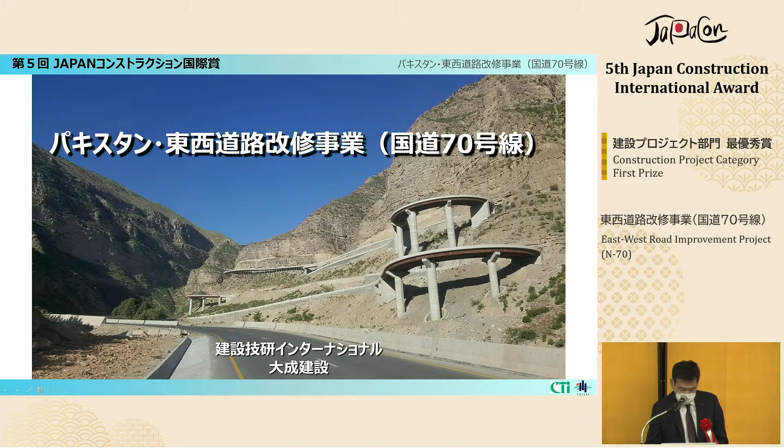This project is part of the National Road Improvement Program in Pakistan, financed by loan assistance from the Japanese government. The aim was to enhance the overall capacity of the N70 corridor and make the road more resilient against natural disasters. The consortium headed by CTI Engineering International provided advice and expertise in design and operation management, and our company completed the construction. The project improved the 12-kilometer road with a height difference of 600 meters in steep mountainous areas. Construction started in 2016 and was completed in 2019.

This is a map of the area to give you some background. Route N70 is one of the major highways running through central Pakistan, connecting the two major cities in the east and west of the country, from Multan to Quetta, 445 kilometers in distance. There are major cities like Islamabad or Karachi in the eastern flank of the Indus River, which runs through central Pakistan, and there's a well-developed transportation network connecting north and south of the eastern half of the country, but there are only a few major highways connecting the thriving east to the mountainous west.

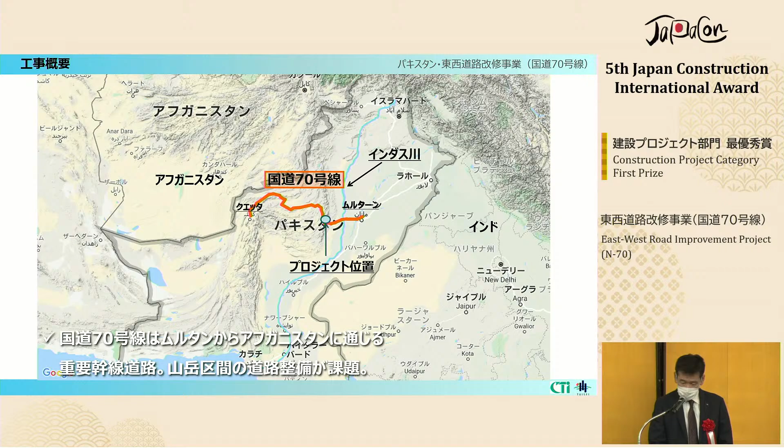Also, Route N70 is an important road connected to the border with the neighboring country, but the improvement was coming in late because the section of road in the scope of this project is known as the hardest part in the steep mountainous areas, requiring advanced construction technology and expertise.

This is the situation of the road before the project started. The sedimentary rocks form the steep terrain, making it a really vulnerable foundation with weathered rocks strewn on the slopes beside the road. The narrow road runs on the steep slope with a lot of congestion and closures along the way due to debris and fallen rocks.

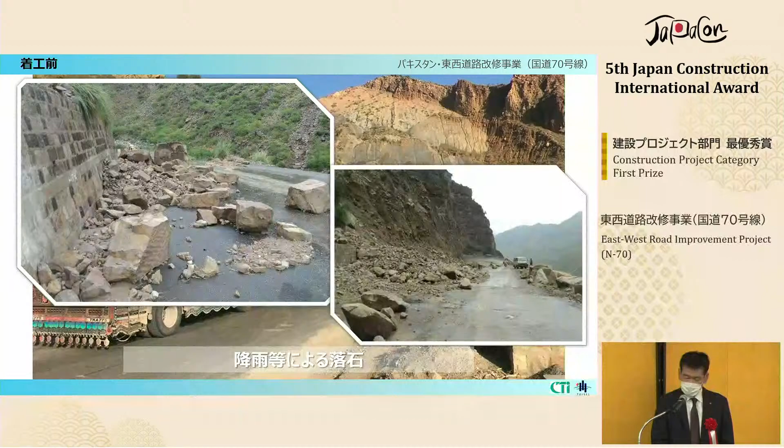The section of the road in the scope of this project was particularly narrow and steep with a series of tight curves, and vehicles had to stop to go around them. As shown in the picture, these trucks needed to turn the wheel several times to let other cars pass through.

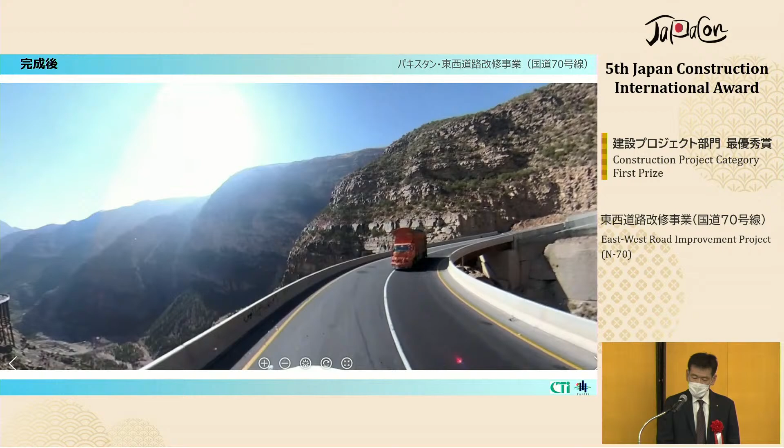This video shows the same section of the road after the improvement. There are two lanes on the road, and those curves were made much smoother so that heavy trucks can easily go around.

This is a summary of the construction methods adopted in this project. The aim was to increase overall capacity and resilience against natural disasters. We expanded the road width to two lanes from end to end and improved the road alignments in terms of slope and curvature by constructing additional 11 bridges at the steepest sections and sharp curves. For the tight curves on the steep slopes, shown in red circles, we constructed circular steel box girder bridges.

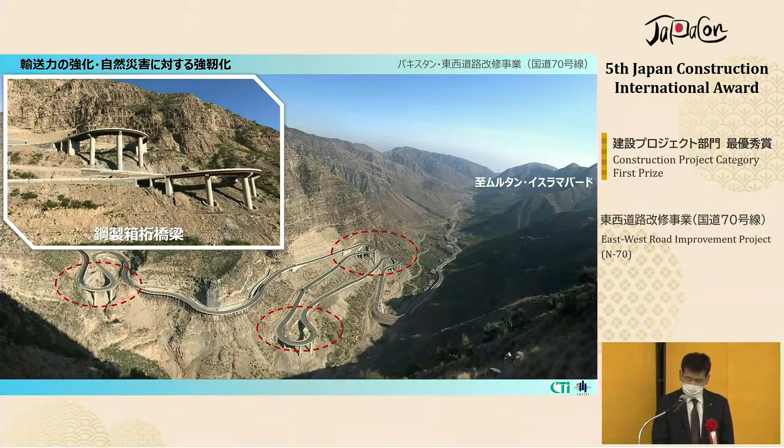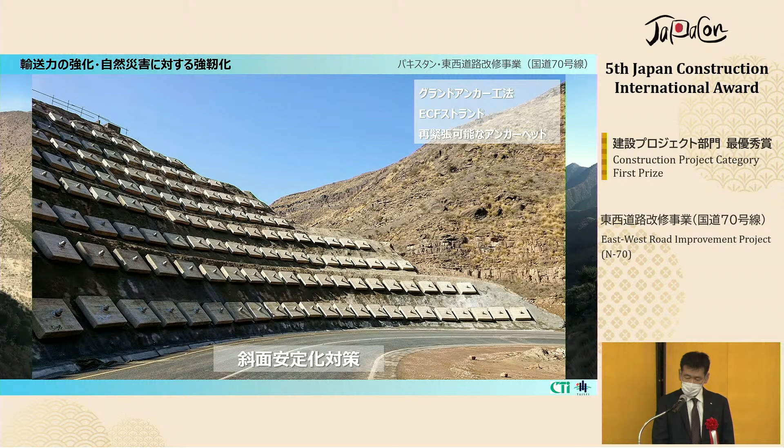Other Japanese engineering methods and technologies adopted for this project include ground anchors to stabilize slopes, as well as the foamed cement banking method and mechanical stabilized earth retaining wall construction, to improve the road alignment and reduce the life cycle cost at the same time.

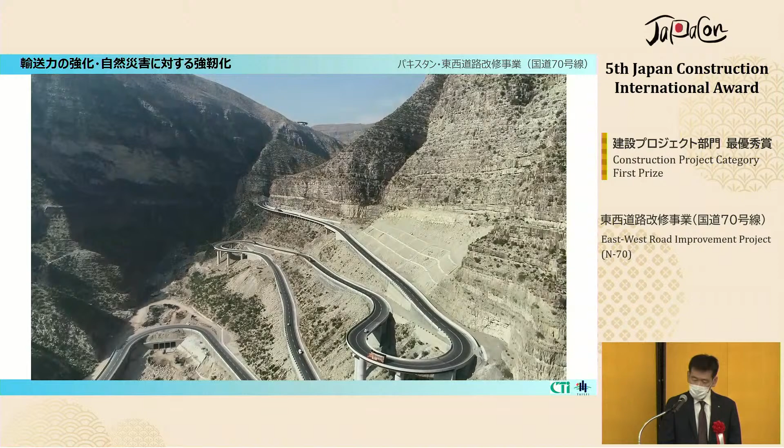You're watching aerial footage of the section of road which was in the scope of this project. It clearly shows a very tough, steep terrain. The specification requirements for this project are as follows.

One of the biggest challenges to complete the project was how to ensure security in the area. We needed to reinforce security around the workers' camp and offices. The client also hired armed security guards to protect the camp as well as to provide security to the workers in traveling, so the staff coming from Japan experienced some inconvenience. But we were provided with security information by the Japanese Embassy, the Ministry of Foreign Affairs, and JICA so that we could successfully and safely complete the project.

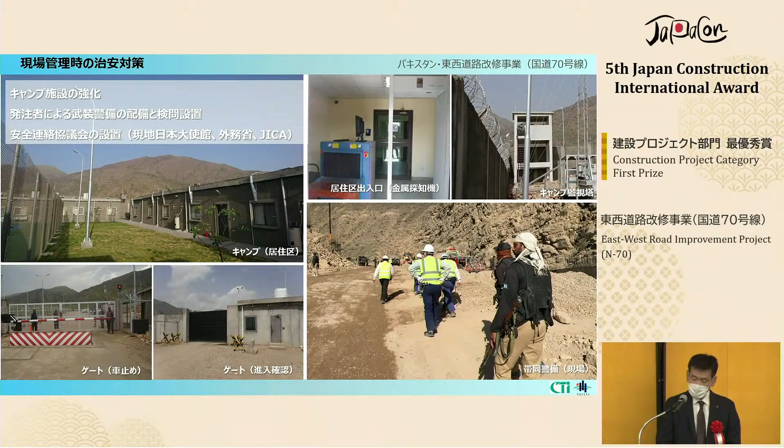Last but not least, let me talk about some of our initiatives that deepen the friendship between Japan and Pakistan. It was difficult to conduct PR activities during the project because of security concerns, and yet the Japanese construction and engineering technologies used in this project were featured at some of the events and parties organized by the Japanese Embassy with government officials of Pakistan, or a meeting with Pakistan's Prime Minister.

We also engaged the client in writing a maintenance manual to ensure proper maintenance, and also engaged local construction workers in skill training with Japanese companies. After the project was completed, some of the workers are now involved in construction projects in Japan.

This project accomplished the mission of improving the national road in Pakistan by using Japanese technologies. We are convinced that this project wouldn't be a success without the team of Japanese companies mobilizing their expertise and resources. We are also extremely grateful for the support and assistance provided by the Japanese Embassy, the Ministry of Foreign Affairs, and JICA. Last but not least, we want to express our deepest appreciation to the Ministry of Land, Infrastructure, Transport, and Tourism for this precious award, which highlights the achievements of Japanese construction companies. Thank you very much.

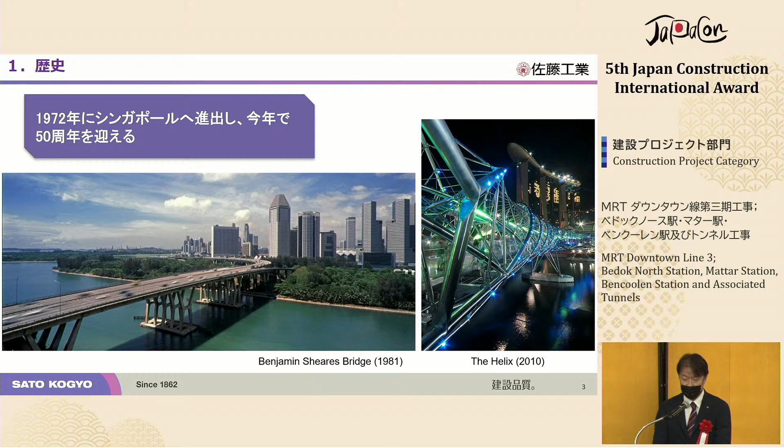During the 50-year history, we helped build iconic structures in Singapore, such as shown in these pictures: Benjamin Sheares Bridge, or the Helix. I think many of you know this building - it's a stainless bridge next to the Marina Bay Sands.

We're currently involved in projects right now as well. So let me give you an overview of the 3 projects for which we received the award. This is the Singapore MRT line scheme.

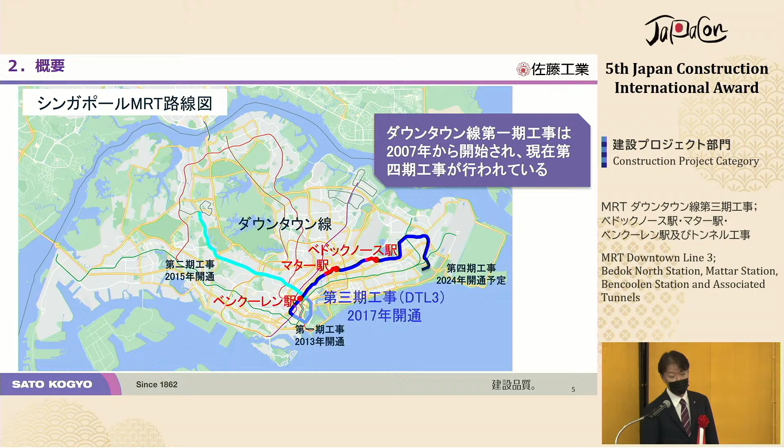MRT Downtown Line. This connects the north residential area to the south, more commercial areas, and you see Changi International Airport. Again, this part is also a residential area. We are involved in the Line Stage 3 construction. We constructed Bencoolen station, Mattar station, and Bedok North station, and associated tunnels.

So for each section, this is the overview of the construction. The client, or procuring entity, is the Land Transport Authority of Singapore. The period lasts from April 2011 to December 2016. This is designed by Arup, a British design office, and EDIS, the construction and interior company in Singapore. So we partnered with these teams to finish the construction.

The hallmarks of this construction is that it has 6 basement levels with a total floor area of 24,000 square meters. For construction of the new underground station, we used the inverted lining method in a very limited space.

The ground consists of sandstones, and it's 43 meters deep. The Roppongi station is actually 40 meters deep, so it's deeper by 3 meters.

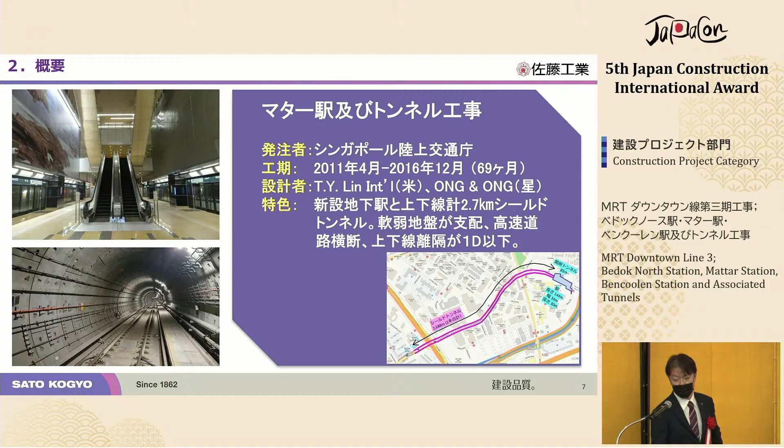This is the station, a Mattar station, and associated tunnels. The client was the Land Transport Authority of Singapore. The construction period was from April 2011 to December 2016. One of the hallmarks, the difficulties of this construction, is that the ground was really soft.

This is Mattar Station and associated tunnels, designed by TY Lin International and ONG. This is mostly soft ground.

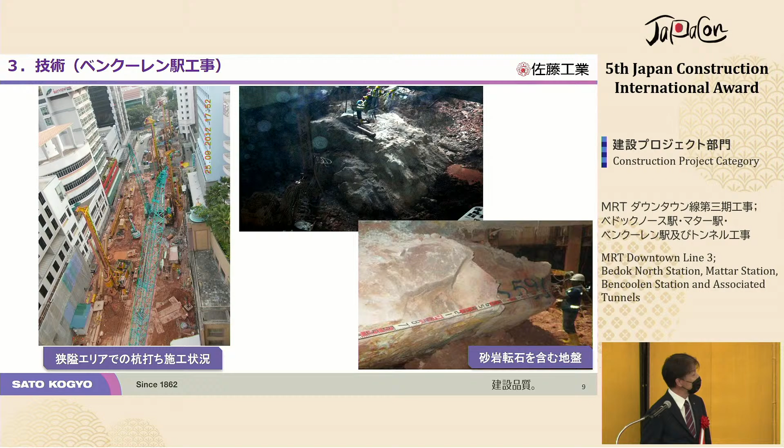One of the technological challenges is for Bencoolen station, where you see a lot of gigantic boulders, like a meteor, really gigantic rock we encountered as we excavated. Also, the area is really a limited space.

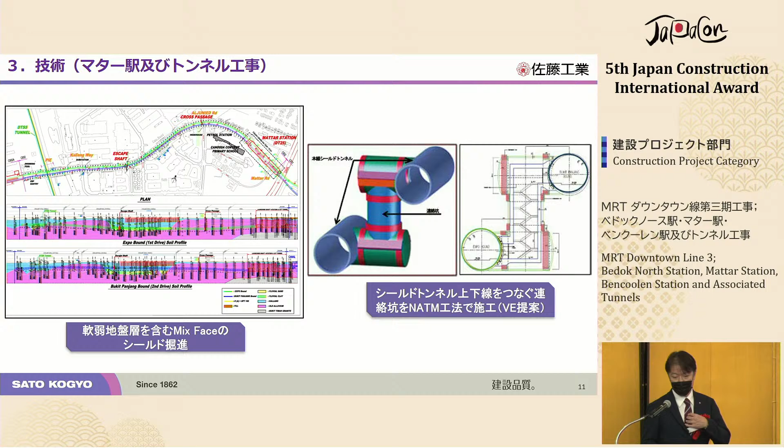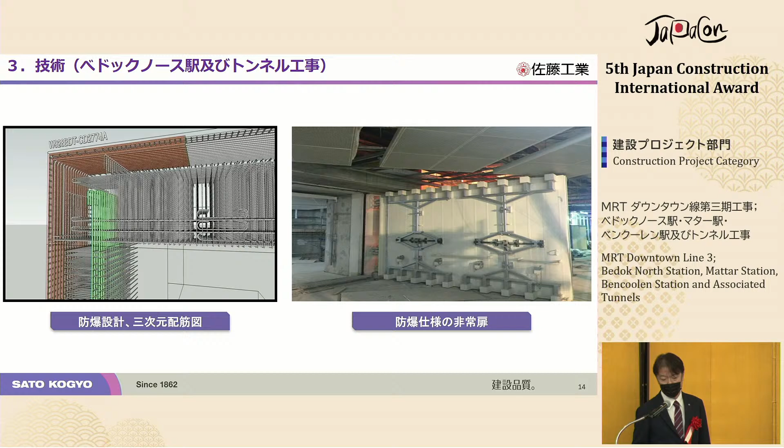For Bedok North Station, we used a TBM manufactured by a Japanese manufacturer, and this was an explosion-proof station. So we did reinforcements, and we have been recognized by Singaporean authorities for the construction.

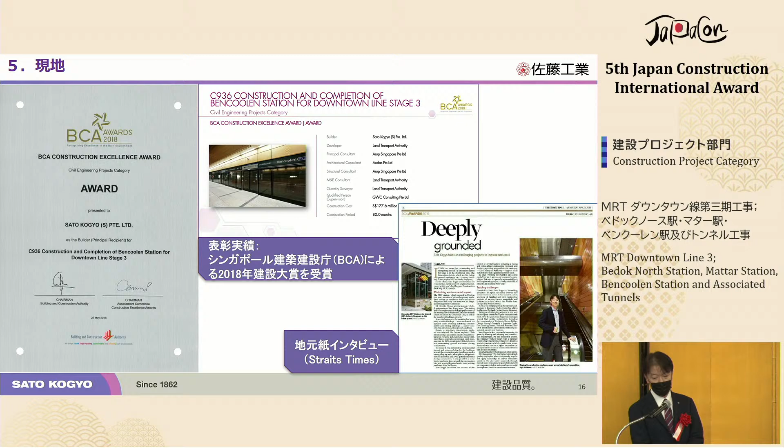Our construction efforts were covered by local media, and we received the BCA Construction Excellence Award. There was much media coverage in the local media.

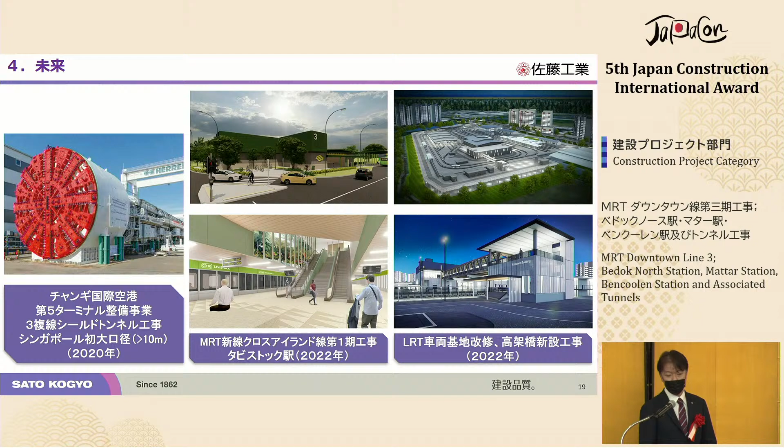We are currently involved in 3 more projects: the construction of a new terminal at Changi International Airport, the MRT New Line Cross Island construction for Tavistock Station, and a large-scale renovation for the LRT rail yard.

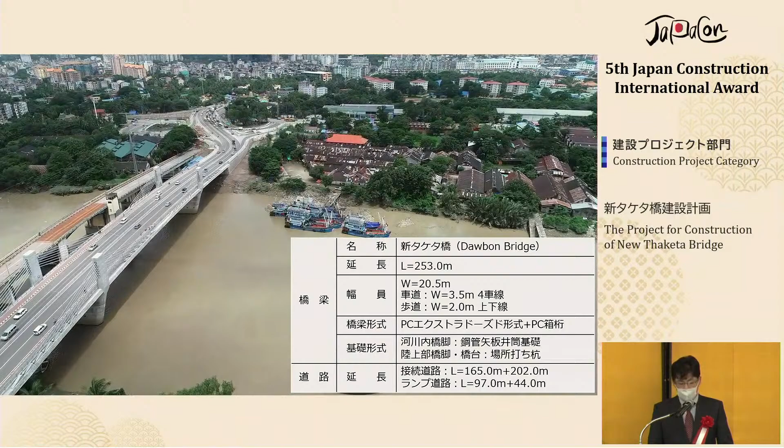This is the picture, aerial footage of the bridge after the construction is completed. The new Thaketa Bridge, also known locally as Dawbon Bridge, is the core of this project. The bridge is 253 meters long and 20.5 meters wide. It's a PC extradosed bridge with towers and diagonal bracing.

A steel pipe sheet pile foundation was adopted for the bridge piers, supported by the cast-in-place piling method on the surface. The project was financed by grant aid provided by the Japanese government. The procuring entity was the Ministry of Construction of Myanmar. It was designed by Nippon Koei and constructed by the consortium of Tokyu, Toyo, and IHI Construction Services, and the whole project was managed by JICA.

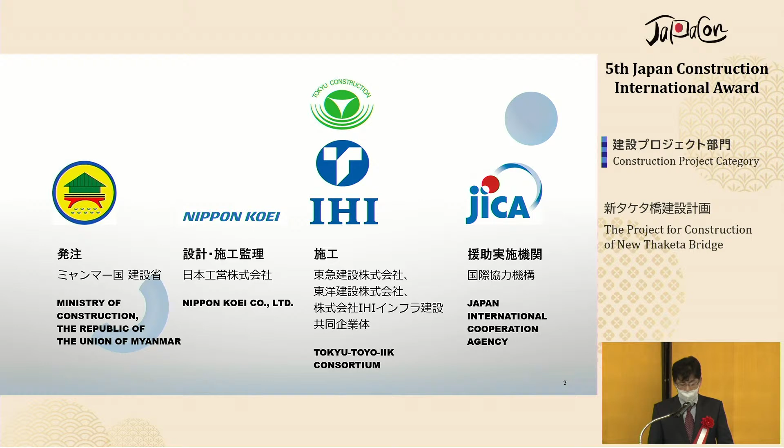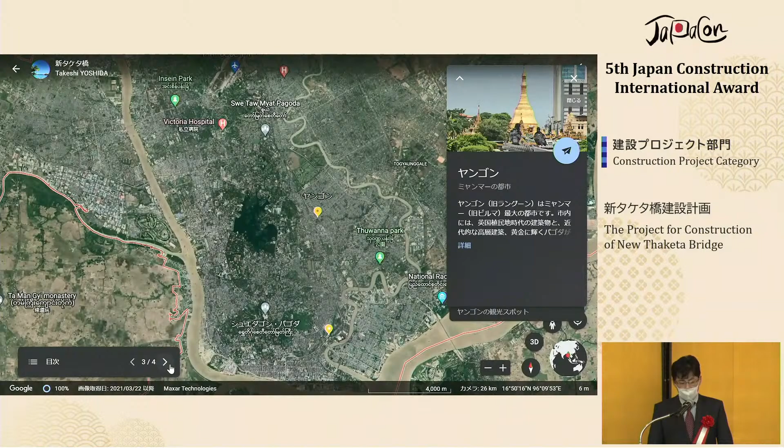The distance between Myanmar and Japan is approximately 4,500 kilometers, taking about 8 hours by air. Myanmar is the westernmost country in Southeast Asia, sharing borders with India, Bangladesh, China, Laos, and Thailand. The largest city, Yangon, is located in the south of the country, and the existing bridge over Pazundaung Creek connects the city center and the special economic zone, and is one of the logistically important bridges in the country.

The aim of this project is to construct a new bridge next to the existing bridge and connect it to the existing roads with connecting roads. It was a construction of roads totaling 620 meters in length. The road expansion project was carried out at the same time by a Burmese company for the Blue Line section of the road. As a result, the roads now have 4 lanes, and traffic congestion has been eased significantly.

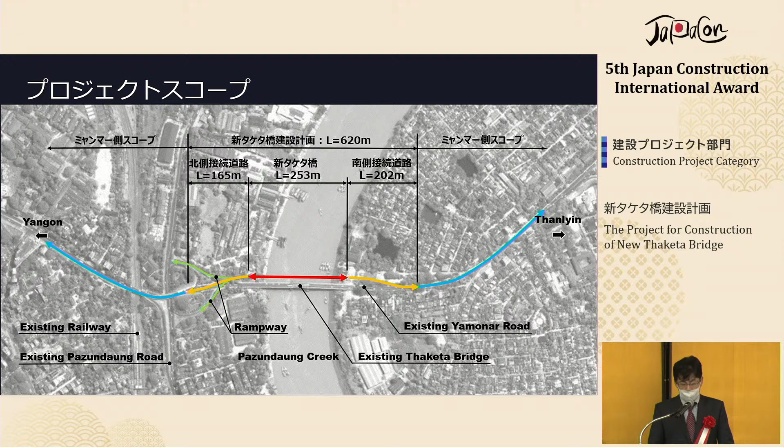The existing bridge has been used for 60 years or so. It has only 2 lanes and very limited space for the shoulders. It used to be a bottleneck and caused traffic congestion. It was an aging, unsafe structure. The project was carried out to improve the situation and to ensure safe passage through the bridge.

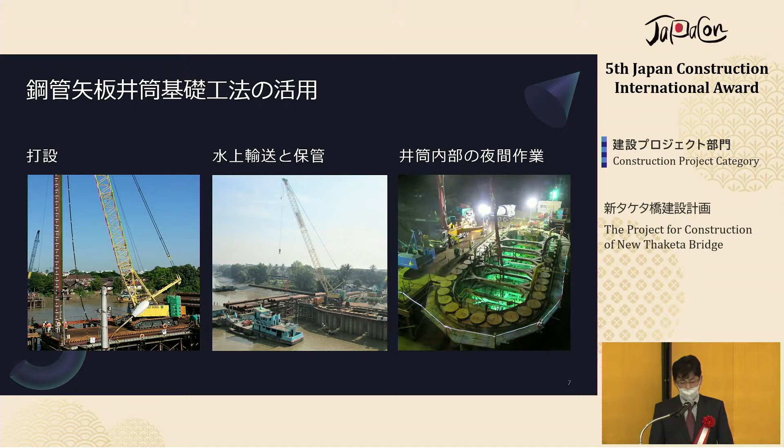One of the technical hallmarks of this project is the adoption of a steel pipe sheet pile foundation for the bridge piers, the first of its kind in Myanmar. This method serves as a cofferdam in a bridge foundation and reduces the construction period. It's also a weatherproof method. One prefabricated long steel sheet pile was transported by ship to complete the foundation work.

Pazundaung Creek is a major waterway, and many ships cruise up and down the creek. We adopted the PC extradosed bridge because of its lower girder height and appropriate span length to ensure unobstructed passage of ships in the waterway.

This was also the first method introduced in Myanmar. The project also involved a technical transfer program for officials of the Ministry of Construction of Myanmar. The program consisted of lectures on survey of rivers and soils and design of bridges, as well as OJT activities where participants experienced field work and project management.

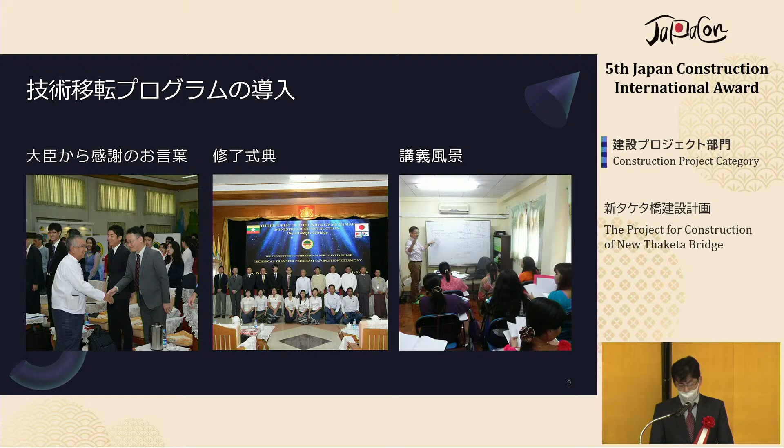Every participant completed the training program, which lasted from January 2016 to February 2018, and in March 2018 a ceremony was held to congratulate those participants, joined by the Minister of Construction of Myanmar.

The project was completed in July 2018 without any major accident, and the opening ceremony was held with much fanfare in September. The opening ceremony was attended by local residents and many dignitaries and guests in Myanmar and from Japan as well.

That brings to an end of my presentation. Thank you very much.

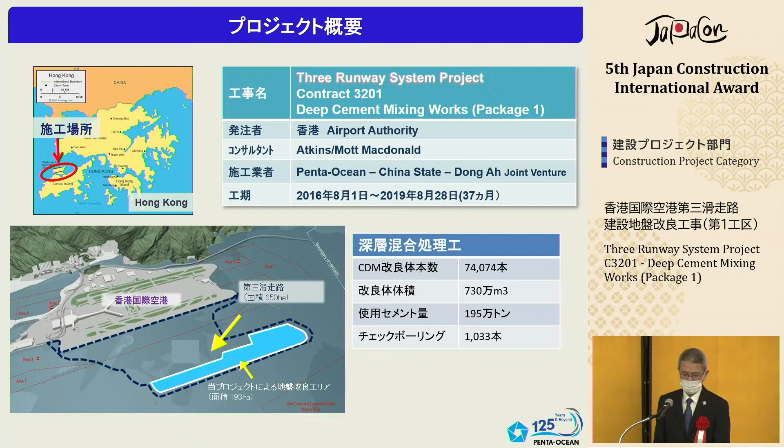We had Airport Authority Hong Kong as the project owner. The contractor was a 3-company joint venture, and the improved volume was 7.3 million cubic meters, and the cement used was 1.95 million metric tons. This was quite an extensive size of project.

The challenge was insufficient soft ground strength and subsidence in coastal development, so we applied this method. Back in 1975, the cement slurry mixing and solidification method was established and put into practical use, and we've been accumulating a great track record with this method inside and outside Japan.

The characteristics and strength of this method are that strength emerges in a short period of time, shortening the construction period, with no liquefaction and minimal impact to the environment. These are the strengths that attracted the interest of the project owner.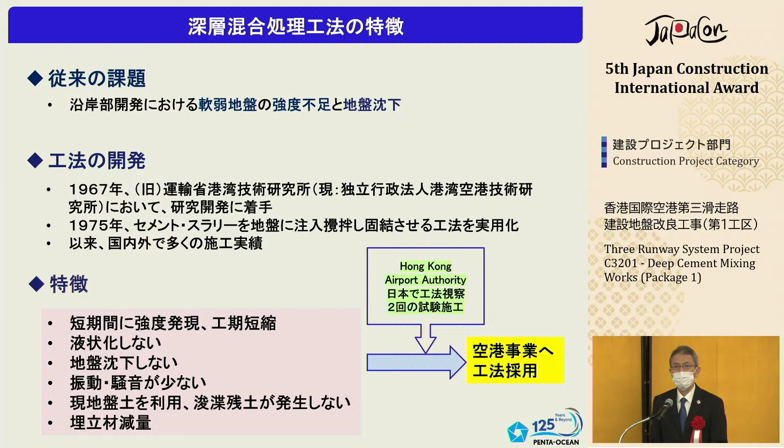We conducted testing in the field after doing small-scale testing in Japan, and we adopted this project. This is the state of the site back in 2017.

We had 40 operating ships. In total, 200 cruisers and ships dealt with this project, so we needed to orchestrate all these activities done by many ships. We laid out various schemes, including what to do in case a typhoon hits.

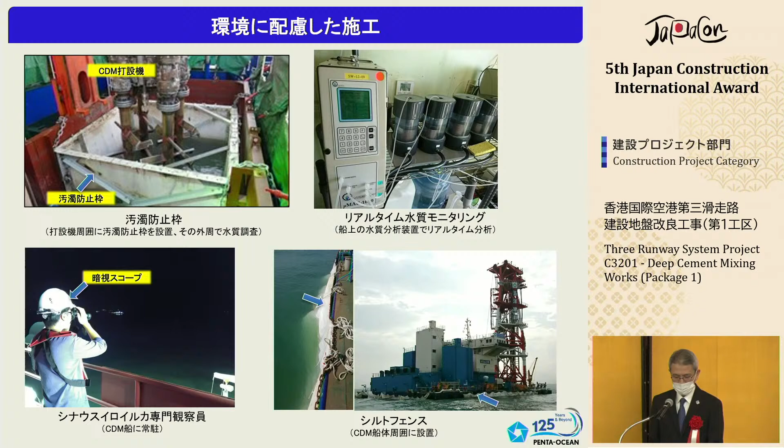We took extra measures to make this an environmentally friendly construction. Pollution prevention frames were put in place, and real-time water quality monitoring was done day and night. If we noticed any irregularity, we stopped the whole operation, prioritizing minimizing impact to the environment.

This was quite a diverse, inclusive project. We had Indonesian and Nepalese people in the field, so we used several languages in communicating. We had virtual reality for remote work done by people managing the process in Japan, and we prioritized safety, making sure all involved could contribute in the best way possible.

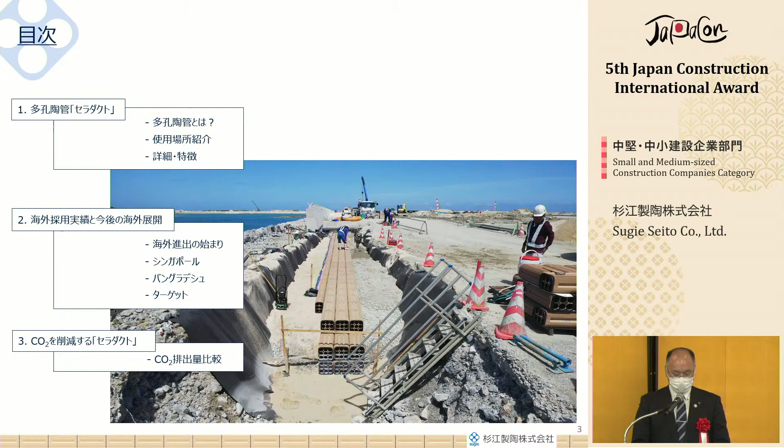First, about our company. We're based in Aichi Prefecture, with factories there too, and we have branches in East Japan, West Japan, and Singapore. We manufacture and sell perforated ceramic pipes for underground cable protection. We established our business back in 1906 as Sugie Pottery. There are three items I'd like to cover in this presentation: first, what CERA-DUCT is, the perforated ceramic tubes; second, how we've been doing business overseas; and third, how CERA-DUCT reduces CO2 emissions.

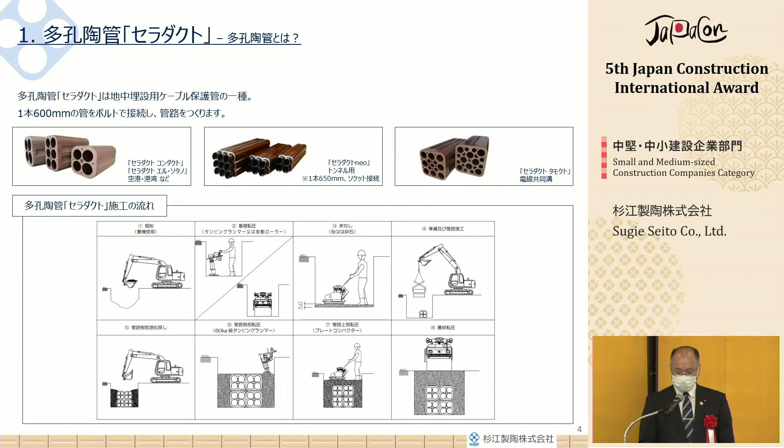So what is CERA-DUCT, the perforated ceramic tubes that we manufacture? This is quite a versatile tube. We can shape them in many different forms, used in many different construction sites, including airports, ports, tunnels, power stations, etc., and underground tunnels for electric cables. We have a track record of this being used in 30 different airports. For tunnels, this has been very valuable material because it's fire resistant, and it's a very efficient cable tube for very limited spaces.

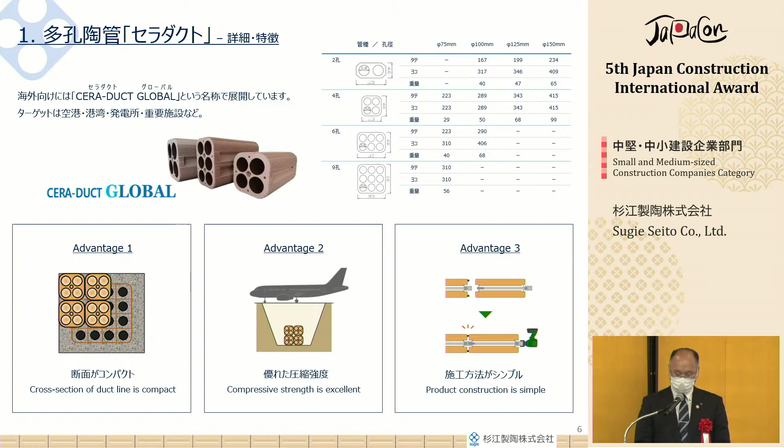With a great track record inside Japan, we decided to go global with CERA-DUCT GLOBAL. We have three advantages to this product: first, the cross-section of the duct line is very compact; second, the compressive strength is excellent; and third, the product construction is super simple. Because of these advantages, we can minimize the cost and shorten the lead time that our clients need to achieve their goals, and we've been supported by many business partners in building up a great track record.

CERA-DUCT is quite heavy material, so at the beginning, many people thought it would be difficult to export economically. But we had a project in Okinawa, and we discovered that the transportation cost wasn't as much as we thought. So we started going global, but we had no track record doing business outside Japan.

It was very, very difficult to break the barrier. But there was an international business promoting workshop led by the Ministry of Land, Infrastructure, Transport and Tourism. We took part in those initiatives, and we gradually started making a presence and built up success.

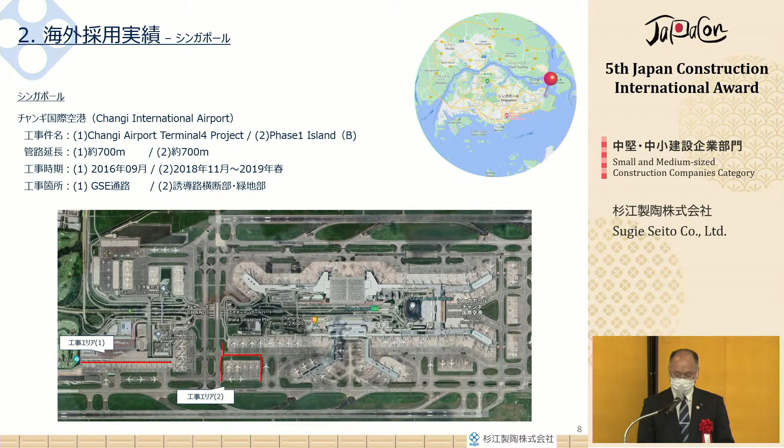This is Singapore's Changi International Airport. We had two phases and two projects, one 700 meters, another also 700 meters. It started back in 2016 and was completed in 2019. We actually did a demonstration bringing our product, and showcased how quickly they could complete the plan, managing to contribute to making the lead time one-third of the original plan.

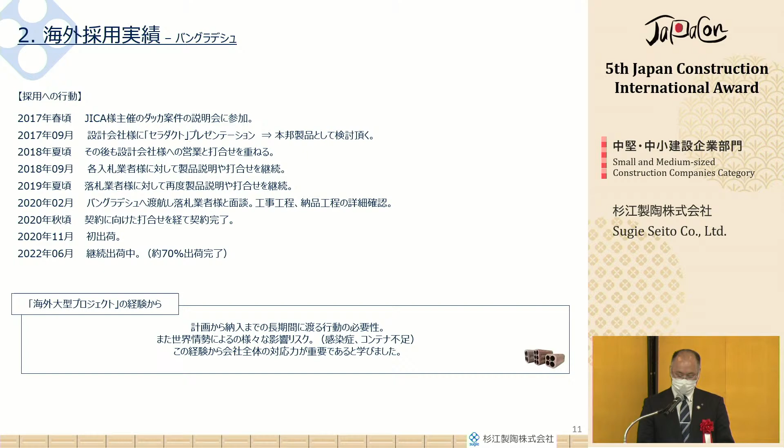This is the second one, Bangladesh's Hazrat Shahjalal International Airport. This too was impacted by COVID, and we couldn't fly freely to the local area, so we managed the project remotely from Japan. We were highly reputed for how our remote management worked quite effectively, harnessing the capabilities of the local people, and we've continued to be bold outside of Japan.

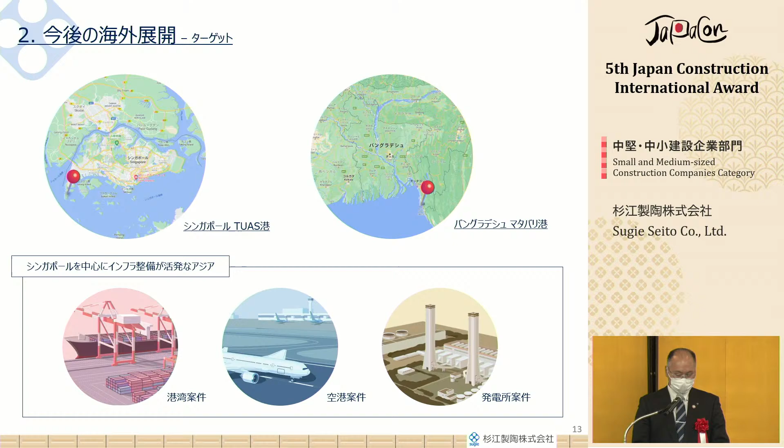We have all these lead projects. We're going to be targeting Asia and various regions as our success-building ground.

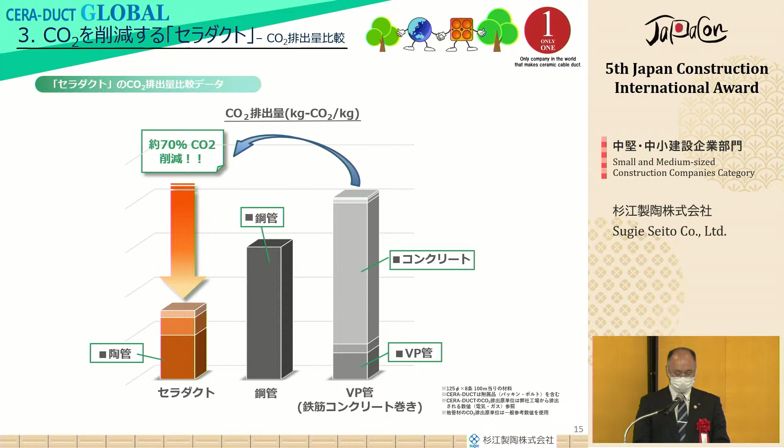This is the CO2 emission contribution we can bring with CERA-DUCT, a comparison with regular cement or concrete. By replacing other materials with CERA-DUCT, we can see a reduction of as much as 70% of CO2 emissions. We will be harnessing the strength of ceramics, and would like to contribute to society and businesses in many different ways. Thank you very much for your listening, and thank you very much once again for the award.

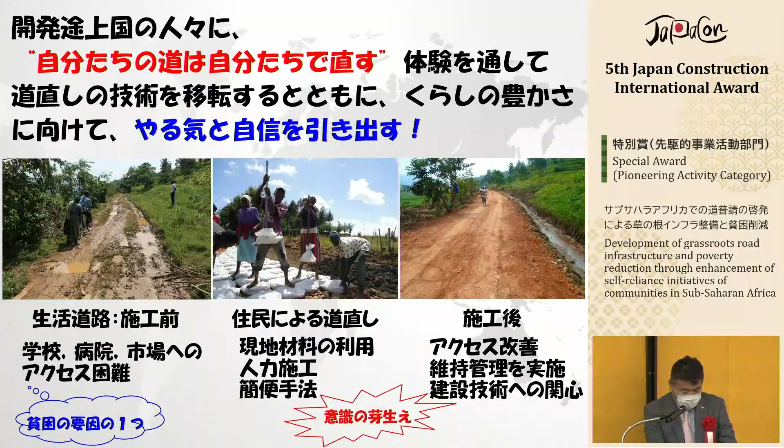We'd like to give this experience of fixing road infrastructure to developing country people, so that they can actually fix all these road infrastructures themselves, making them more confident and forward in building their own infrastructure. The before state is on the left hand side with the sandbag. We could actually fix the road with the labor forces of the local people, not necessarily professionals of the industry. By going through this experience with us, they will learn how to fix it, and eventually be able to do it without any of our help. That's what we'd like to achieve. The do-nou, it's a sandbag in Japanese, but we'd like to turn the sandbag do-nou into do-nou technology.

People might address our activity as a charity, but we don't consider it to be charity. We would like to turn this opportunity and experience into triggering and creating many jobs locally, so that after we leave, there will be prosperity flourishing in the local field with many more capabilities and many jobs.

And we do have a PR video I'd like to show. It's a 3 minute video.

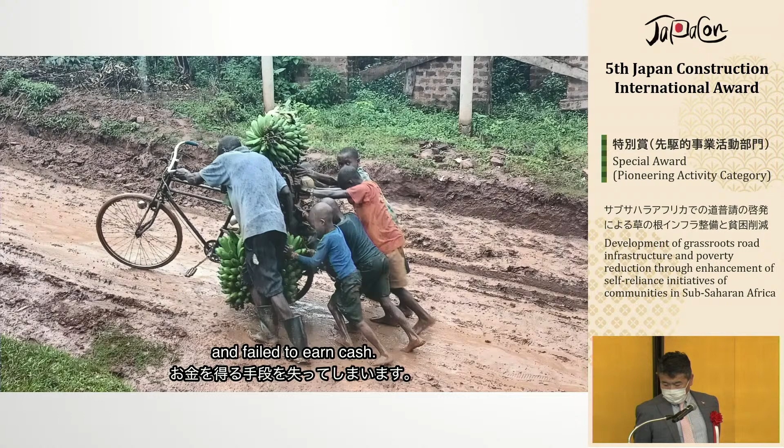Community roads in developing countries are not well maintained, and especially during the rainy season, over 50% of them become impassable. When the roads are impassable, people cannot transport their crops from the fields to the market and fail to earn cash. People cannot take patients to hospital in town. Children cannot go to school. That is one of the factors that prevent developing countries from moving out of poverty.

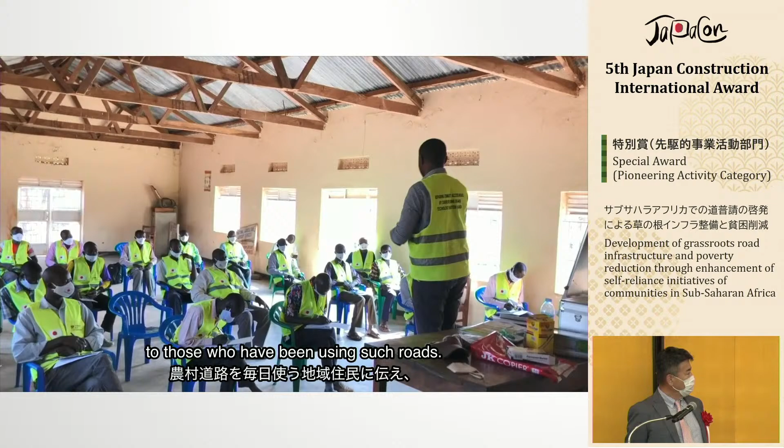This is where we, as CORE, an international NGO, have focused our activities. We are working to transfer the skills of repairing roads using Do-nou technology to those who have been using such roads, and we motivate and inspire them to enrich their lives. Through that, the experience of repairing our own roads by ourselves infiltrates the community.

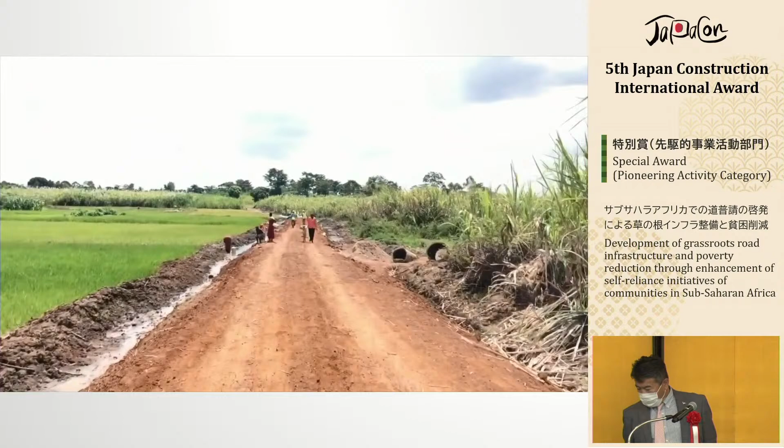There are 4 advantages to applying this technology. The first is that the road can be repaired using only materials that are locally available. Do-nou bags, gravel, and laterite soils can be easily obtained in each country or region where the project is implemented. Secondly, since the work is labor-based and done by hand, it will create employment in the local community. Thirdly, the project is easily accepted by the community because it does not require specialized knowledge. This also makes it easier to maintain the project after its completion, which greatly contributes to the sustainability of the activities.

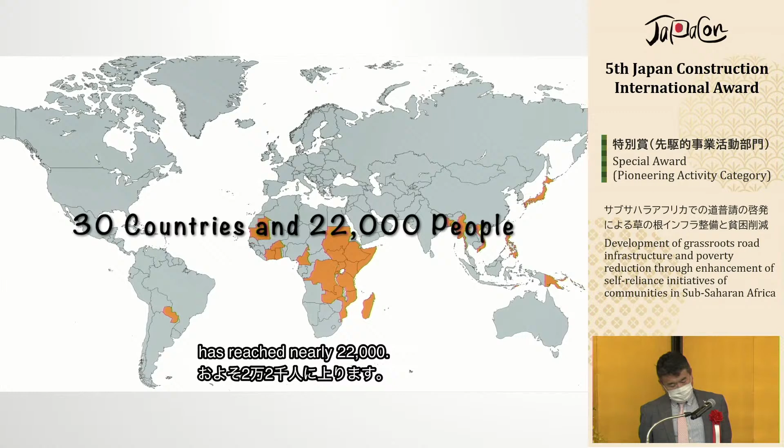Some of our trainees have even established their own companies and create employment in the communities. We will continue to work tenaciously and energetically toward the future, under the philosophy that the challenges of developing countries are to be tackled by the people of the communities in ways that are suitable for the communities.

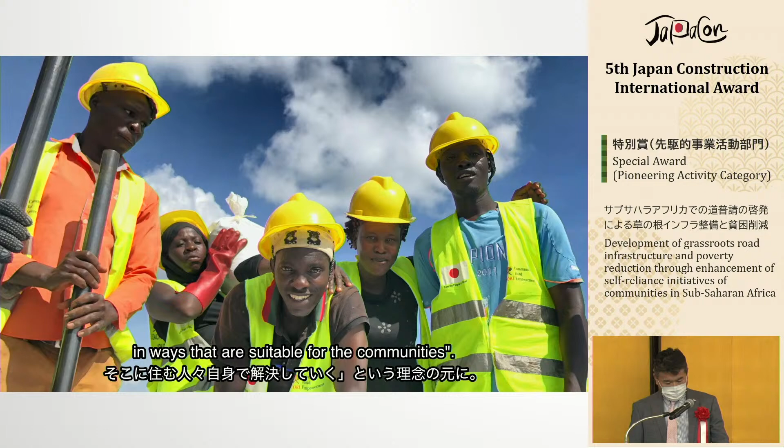Right, so this is us. Presence of Japanese entities is what we'd like to promote. We are professionals of the construction industry, and we'd like to be more and more present in the global sphere, and contribute more to the global world. Thank you very much.

Next up, strategic training of local engineers and companies through railway rehabilitation projects in Southeast Asia, by Tekken Corporation.

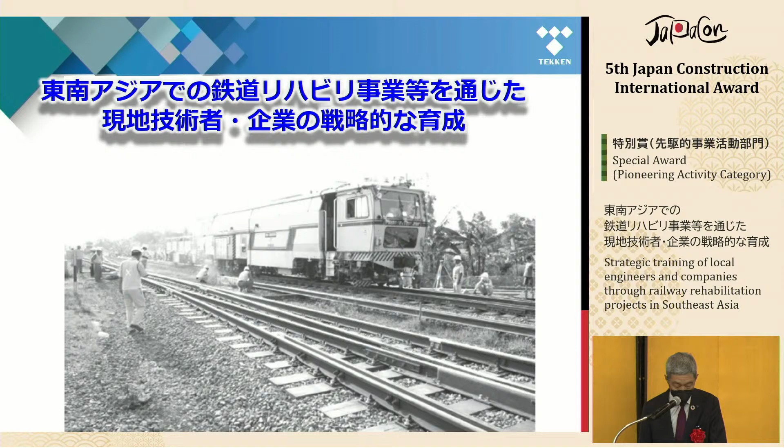Thank you for the introduction. My name is Nakagawa from Tekken Corporation. I'm very honored to receive a special award, Pioneering Activity category. Let me present the overview of our activities.

Tekken Corporation was founded during the Second World War as part of the national policy concern to increase and strengthen the country's land transportation capacity. Renovation of the Railway Management Bureau's head office and construction of bridges on the railways are projects we have been involved in during the earlier stages of our company's history.

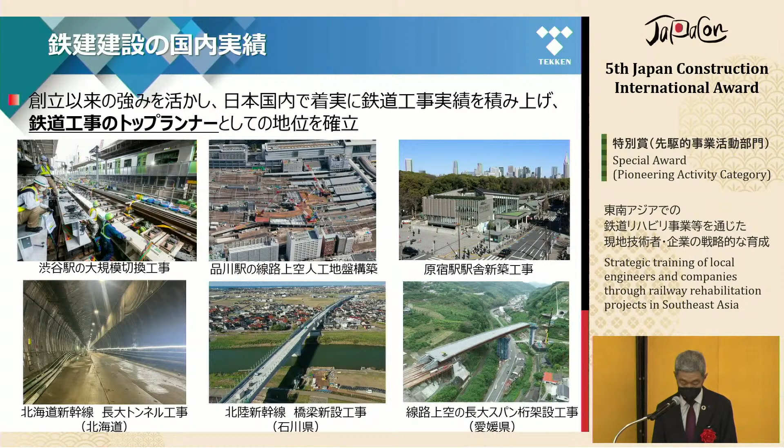We also have a number of achievements in Japan. We have developed expertise and have a lot of achievements in many railway construction projects. As of June 2022, we have participated in construction projects in 13 countries around the world. We started our overseas expansion in Peru in 1961.

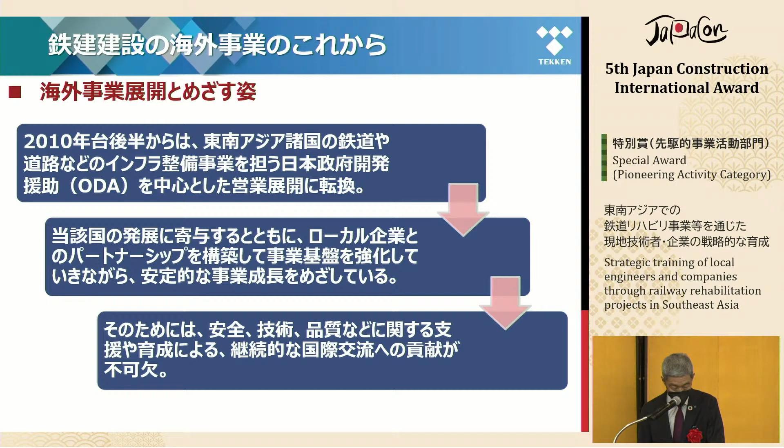Since the late 2010s, we have shifted our focus to Japan's ODA projects for infrastructure development such as roads and railway in Southeast Asian countries. We are committed to making a contribution to the development of those countries, but also aiming at building strong partnerships with local companies to have stronger footing in the local markets for our sustainable growth. To do that, it is essential for us to continue to play our part in international cooperation and to raise the level of our partners.

In overseas projects, the local construction company does the actual construction work, and we provide expertise and technology. But before doing that, we need to raise awareness about the importance of keeping promises, keeping the deadline, and not making excuses. That's what we are trying to instill in the mindset of those local workers.

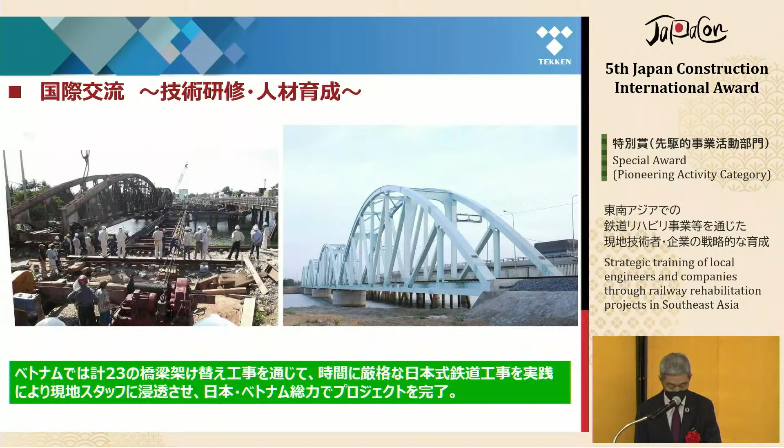In Vietnam, we did replace 23 bridges within the deadline. The local staff didn't understand why the preparation took so much time. The planning and management is really an important part of the project, but we successfully convinced them of the importance of those elements, and they understood the Japanese style of management and planning, thus raising the level of the local staff. These construction projects were covered by the local media in Vietnam, and we were recognized by the Minister of Construction in Vietnam.

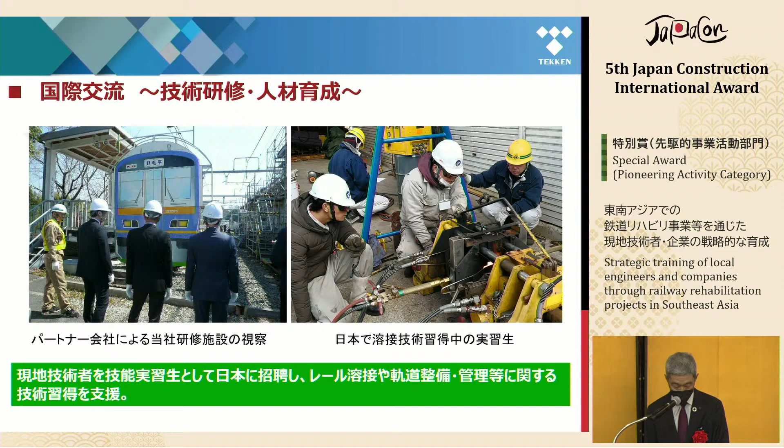And we invited local staff to Japan to provide training and skills development programs. Local staff who learned those techniques in Japan came back to their home country, and they were vital assets in the construction projects. And also they started their own companies and got contracts from the government for maintenance and management works.

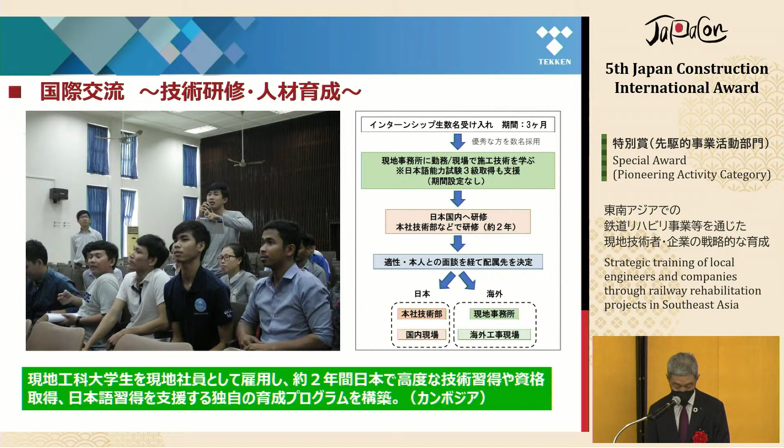This is the picture of when we do the explanation, the introduction of our training program to the engineering students in Cambodia. So they're really enthusiastic, really full of hope. I see not so many Japanese students are like this.

Tekken Corporation will continue to leverage our strength and make a contribution to the sustainable development of society through civil engineering and construction projects, including the area of railway construction. That brings to an end of my presentation. Thank you.

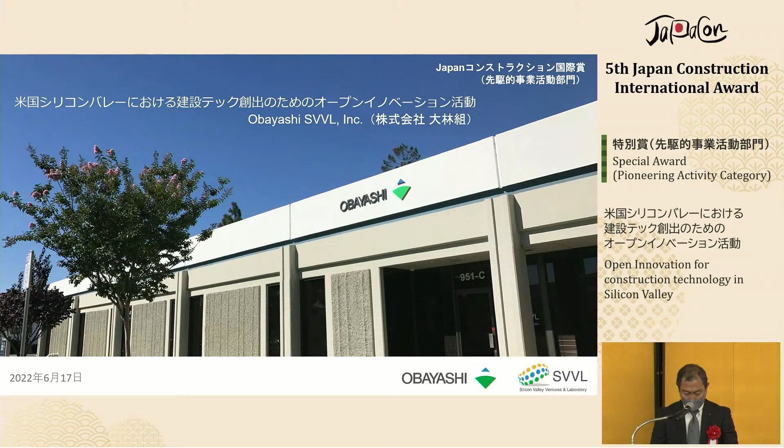My name is Sato from Obayashi SVVL. It's such an honor to receive this prestigious award. Thank you very much. But credit goes to many staff members in this project at Obayashi and other partner companies, and I'd like to share the honor and pleasure of receiving this award. So let me start my presentation about open innovation for construction technology in Silicon Valley.

We created a base to trigger more activities and innovation in Silicon Valley. Especially, we try to improve productivity in the construction industry so that we can regenerate the attractiveness of the construction industry. We are an analog industry, but other industries around us are pushing ahead with digitalization. And we thought that Silicon Valley is the hub of talent and money to start and drive more innovation.

We liken the situation to gearboxes. Once a construction project goes on, it never stops within 2 or 3 years. According to the plan, we need to overcome unexpected elements. In other words, we need to avoid failures. We have to expect many unexpected situations. That's how it is in the construction industry.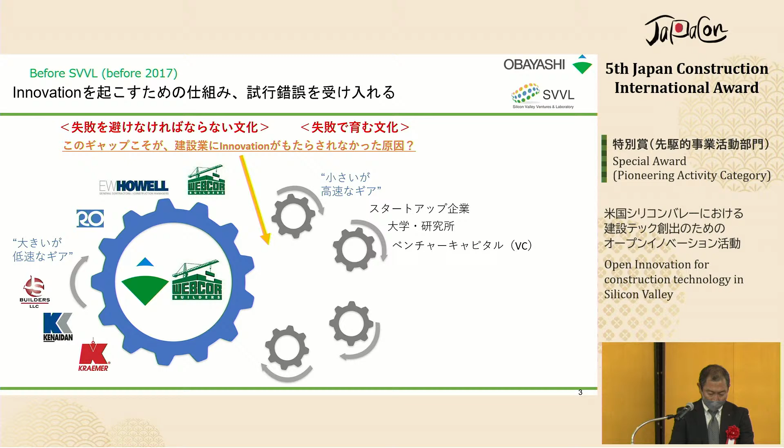But in Silicon Valley, it's likened to a smaller gearbox. It spins faster, although it's small. So they try to learn from their failures, not to avoid failures. And there is a gap between the two types of gearboxes, and that's what hampered innovation in the construction industry. So that's why we try to become a sort of intermediate gearbox, and if we become like that, we can drive more innovation in the industry.

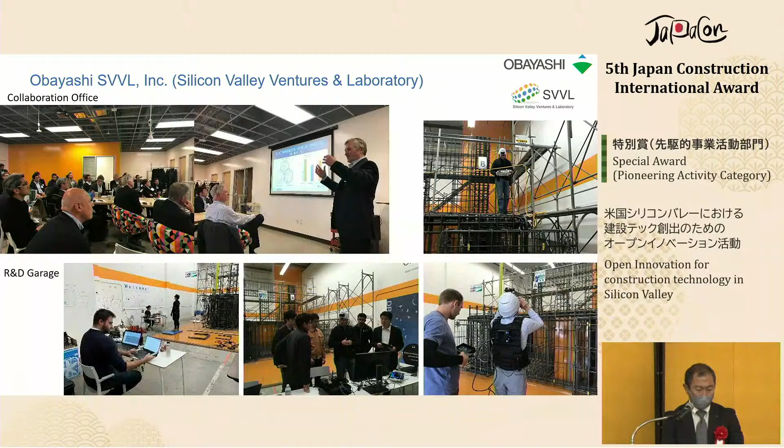That's why we established a base in Silicon Valley. We established a base in San Francisco and also Silicon Valley. We created offices and also created a garage for the test environment. We provide 3 roles for startup companies: we try to promote joint development between Japanese companies and startup companies in the United States, we provide financing, funds and investment, and we try to promote commercialization so that their products and services can be brought back to Japan.

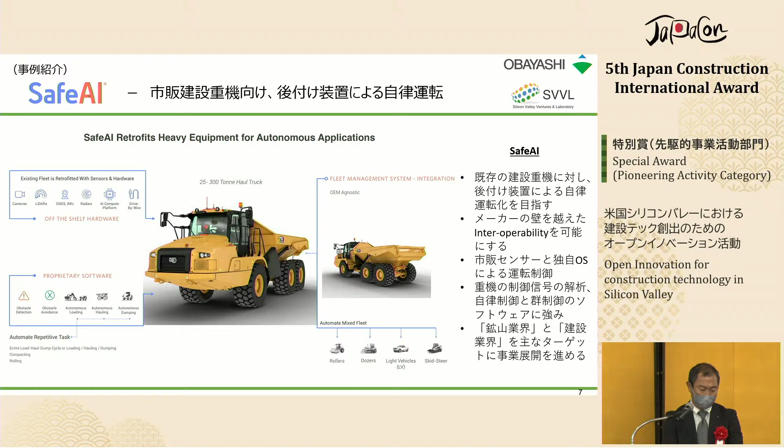This is one example: retrofitting heavy equipment for autonomous applications. This is a joint project development together with SafeAI. Let me show you the video first.

At SafeAI, we know that automation innovation requires rapid evolution. And we are always evolving.

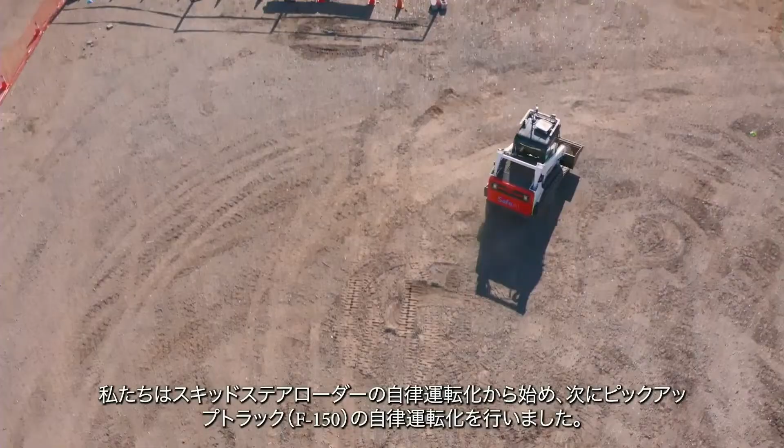We started by automating the very first skid steer, before moving on to an F-150. After that, with unprecedented speed, we retrofitted a CAT 725, making the world's first AI-enabled autonomous articulated haulage truck. That's evolution. That's the power of the SafeAI autonomous platform.

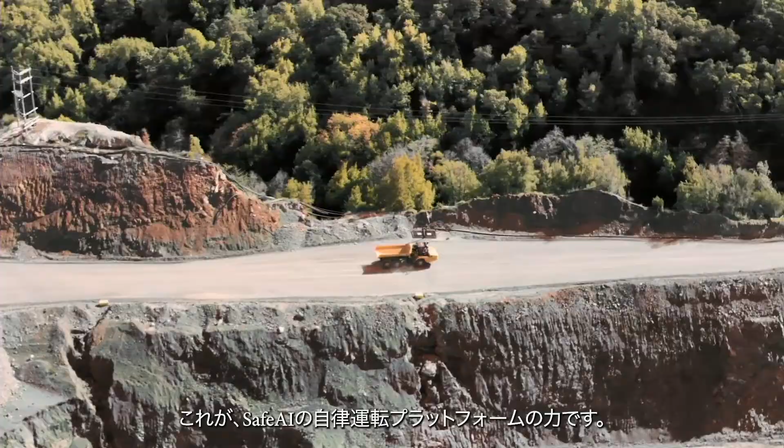And our journey is just beginning. We will never be satisfied with our progress because there is so much more work to be done. Since retrofitting our CAT 725 with Obayashi, so much has changed. We've deployed numerous segment-defining features, increasing capacity for productivity and safety.

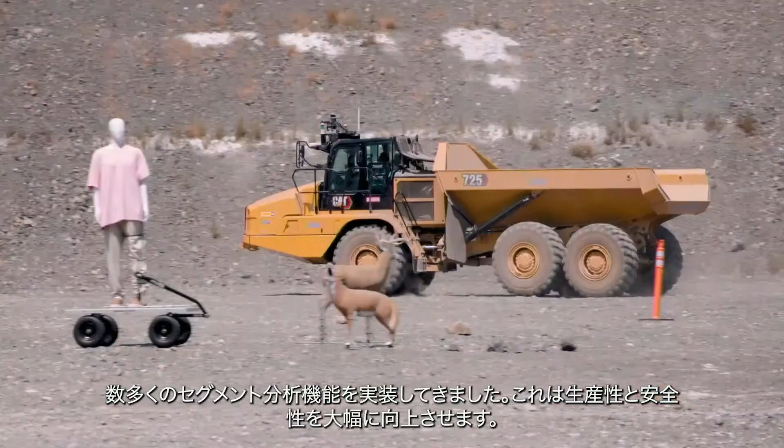We've employed HD camera-based sensors, which enable precise stopping due to accurate obstacle detection. And now, SafeAI can successfully complete a load-haul dump cycle, which involves loader-to-truck communication to facilitate precise backing and positioning.

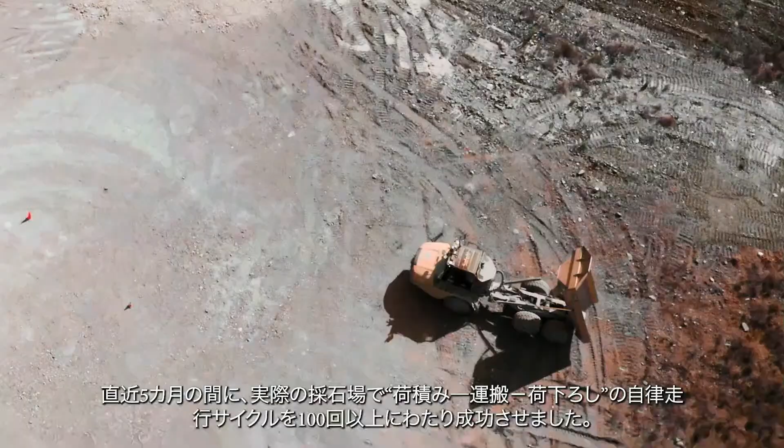We've successfully run over 100 autonomous load-haul dump cycles in the last 5 months, all in an active quarry site. With the addition of our configurable fleet management system, path planning, vehicle insights, and fleet dashboarding are at your fingertips, making operational strategizing and execution far easier.

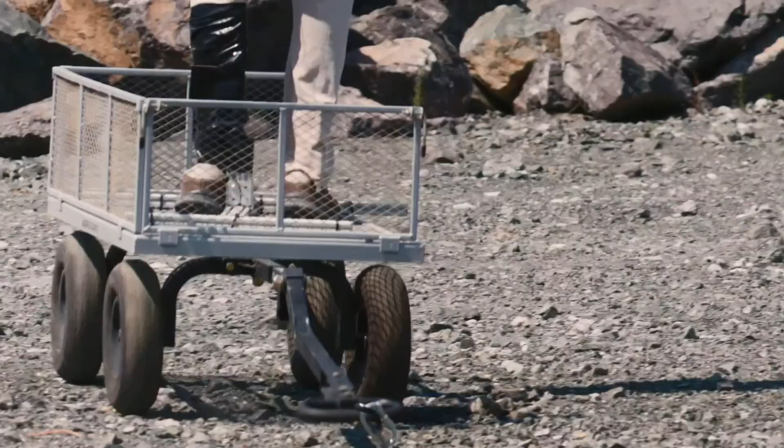This is the continuing vision of the connected worksite, one that is safer, smarter, and more productive. One that is collaborative. Together, we'll forge the future. SafeAI. Let's work together.

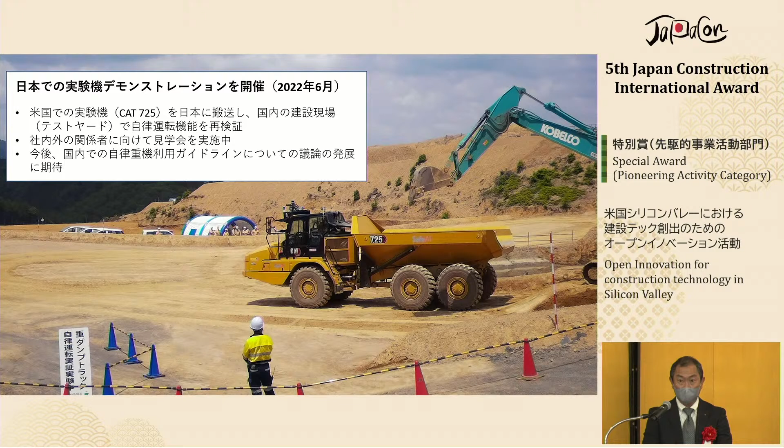So we actually brought back this test equipment to Japan, and we did a series of demonstrations to Japanese suppliers and construction companies. And we hope to give an impetus to the discussion of autonomous driving in a construction environment. Thank you very much.